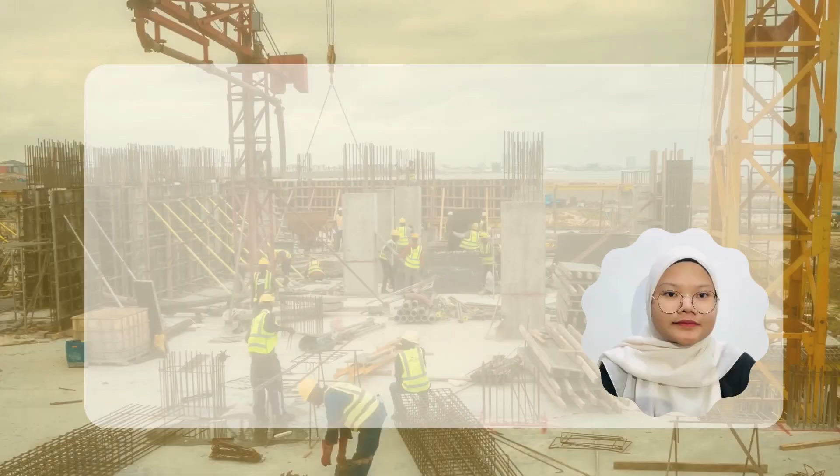Matric number is 2866157. Today I want to talk about construction technology.

Construction technology is defined as a set of innovative tools, which may be software, modification, or machinery, used to carry out construction projects. These tools are highly advanced and improve work speed and quality when put into use. Construction technology is of two types: semi-automated and automated construction tools. These tools are used for different types of projects in the construction industry.

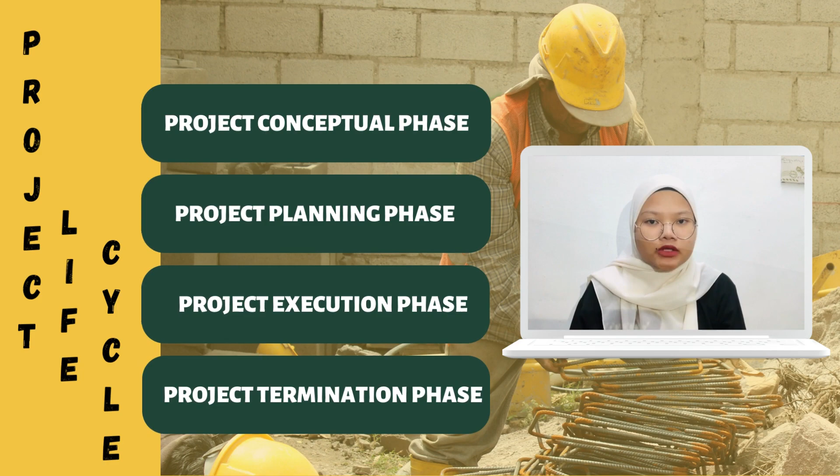Project life cycle is divided into four phases: project conceptual, project planning, project execution, and project termination. Project conceptual determines that a project is needed, establishes goals, estimates the resources the organization is willing to commit, sells the organization on the need for a project approach, and makes key personnel appointments.

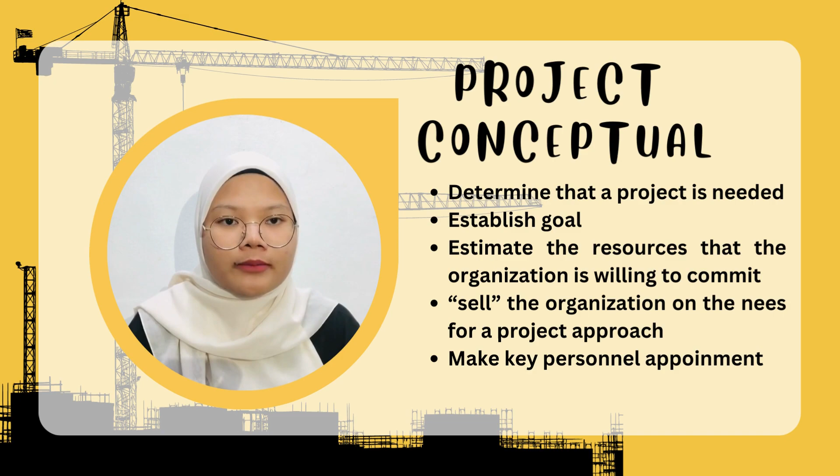Project planning is the most important phase of the construction project life cycle, where the entire scope of the project is defined. The project manager starts breaking down all the work involved, identifying required manpower and material resources, mapping out the project timeline, and detailing the budget. This is also the stage where the project manager anticipates any threats or risks that may arise during construction. Part of the planning phase is appointing all the different construction and third-party companies involved in the building construction.

Project execution is the implementation phase where the project is carried out as planned and physically arranged on site. Each process performed is monitored by the project manager, who compares the tasks performed by each individual with the original planning. If any change or problem occurs, action is taken to ensure the project performance remains good and high.

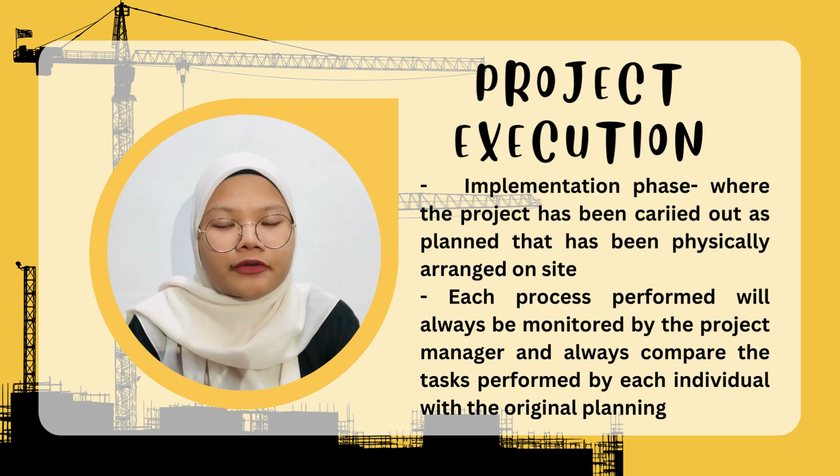Project termination assists in the transfer of project product, transfers human and non-human resources to other organizations, transfers or completes commitments, terminates the project, and rewards personnel.

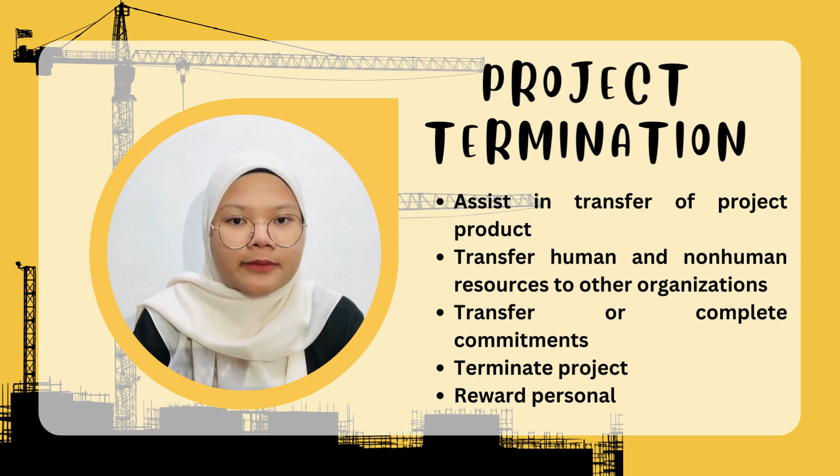Activities involved during a construction project: there are 11 activities, which are marking and grading, excavation, concreting, carpentry, brick masonry, plumbing, welding, electrical, roof laying, glazing, and finishing.

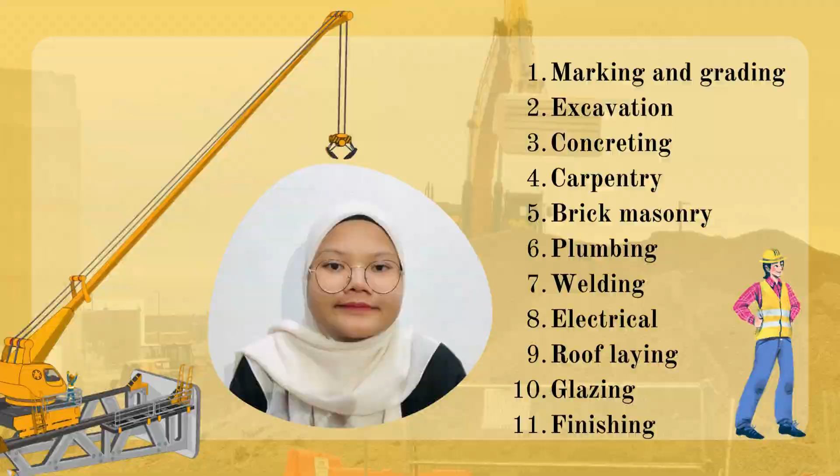Marking and grading. Marking is one of the first construction activities, which involves marking the area of the plot of reference. Grading helps ensure that buildings are even, last long, and maintain maximum support.

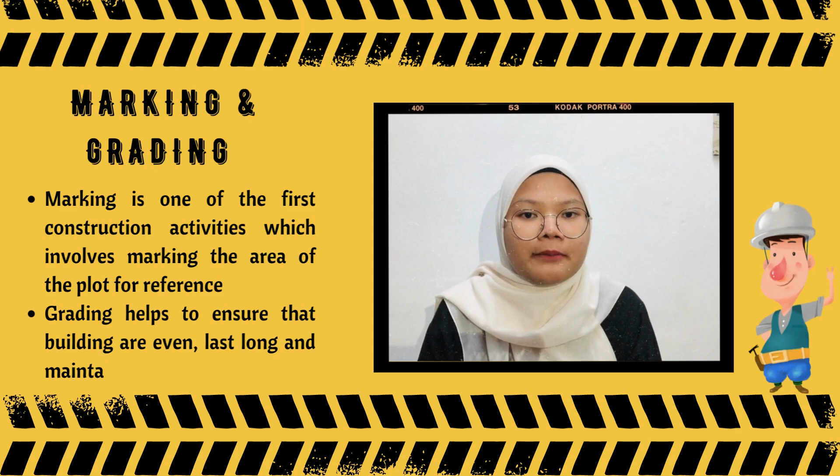Excavation. In general, the term involves moving earth or rock out of a certain area to prepare it for construction. This includes basement excavation, which digs the earth out to prepare for a basement to be built.

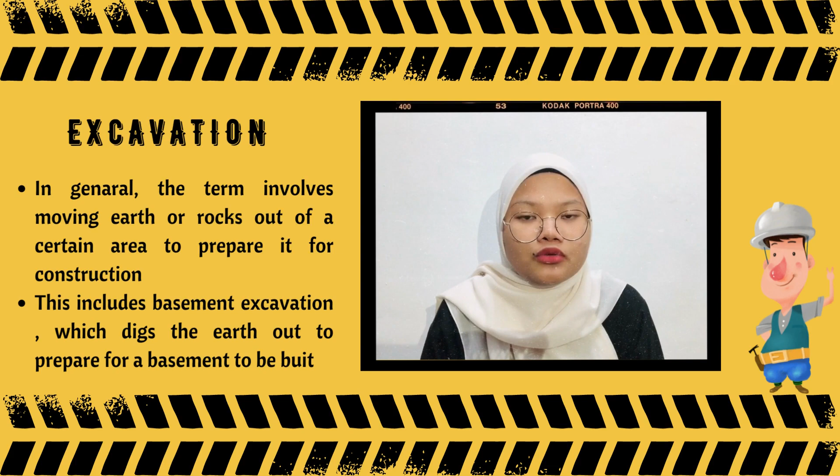Concreting. The process of pouring concrete is another major activity in construction. One of the reasons it has become so popular in the construction industry is that concrete is easy to make in large quantities and it changes state, so it's easy to work with and manipulate.

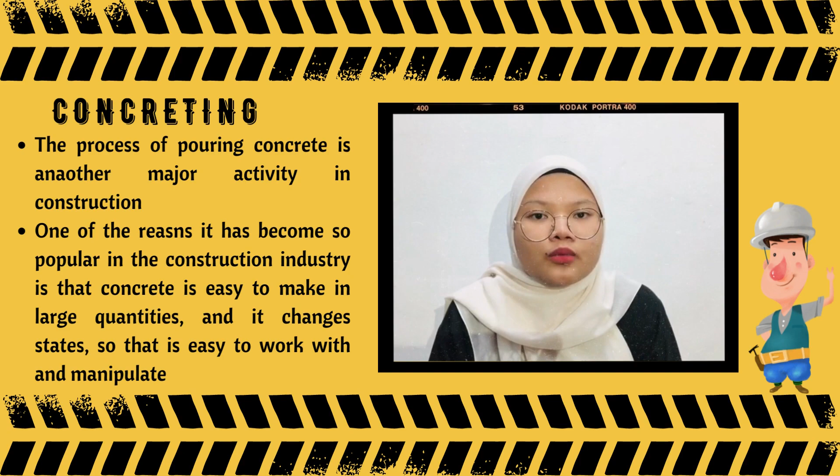Carpentry. This is the general cutting and installation of material that will be used for the construction of a structure.

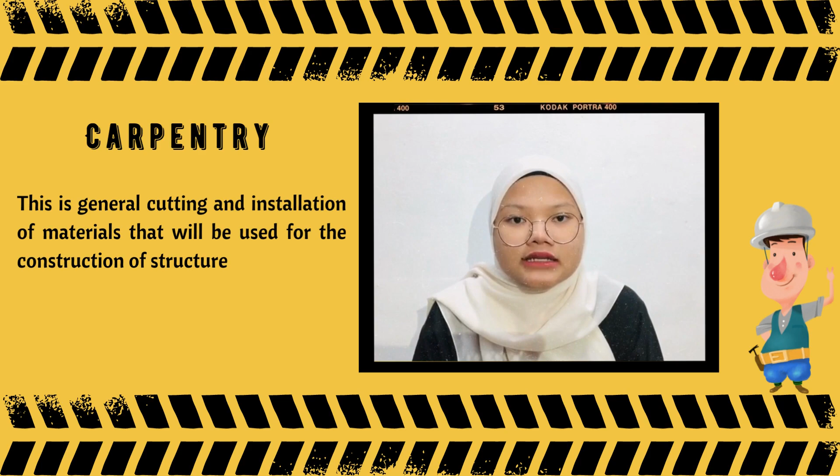Brick masonry. Bricks have been used in construction for decades and are still often used today as a highly efficient material. Brick masons lay the bricks, ensuring they are laid in a way that is structurally sound.

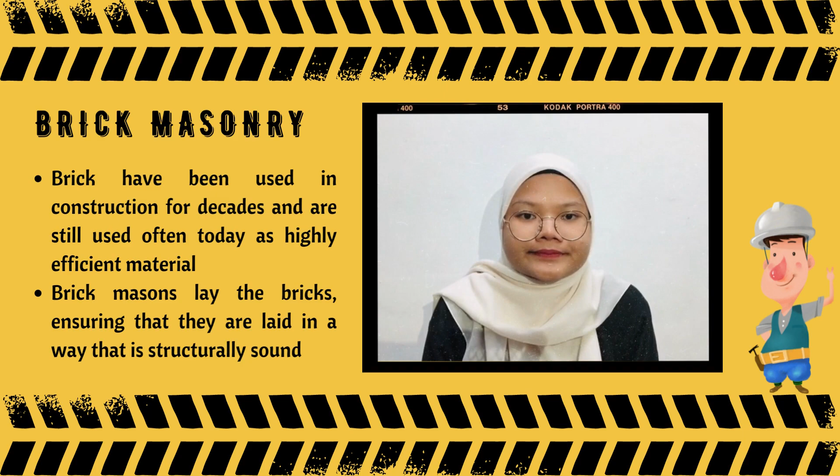Plumbing. In structures that require plumbing, there are specific plumbing activities that must occur to ensure they will function properly. These include putting in piping and fixtures for both incoming potable water and outgoing waste.

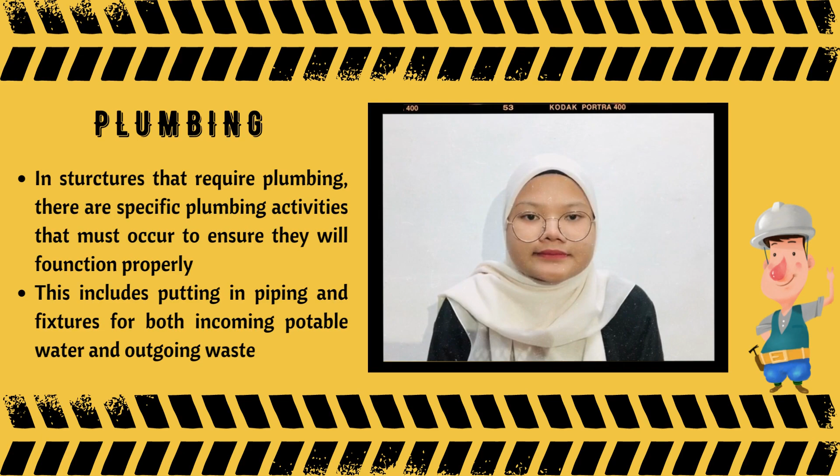Electrical. Individuals working as electricians on a construction project are responsible for ensuring that the structure will ultimately have full access to electricity from the transformer provided by the electrical company, located close to the building.

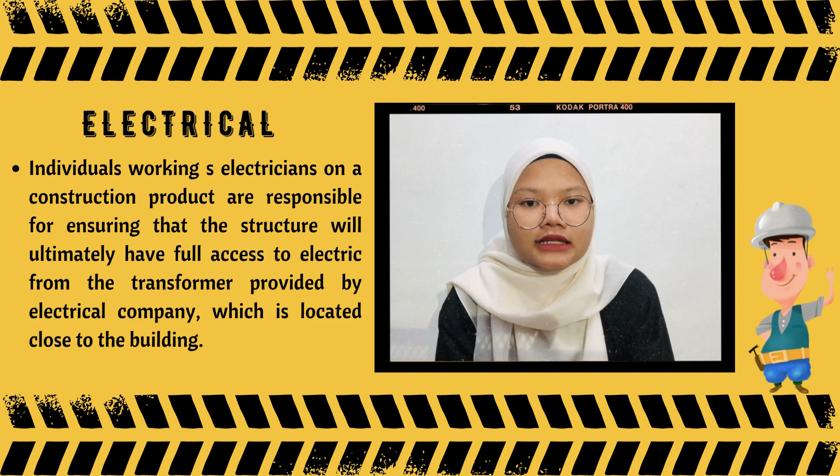Roof laying. Roofing is an important construction activity for ensuring protection of the structure from the elements and can help provide stability for the structure.

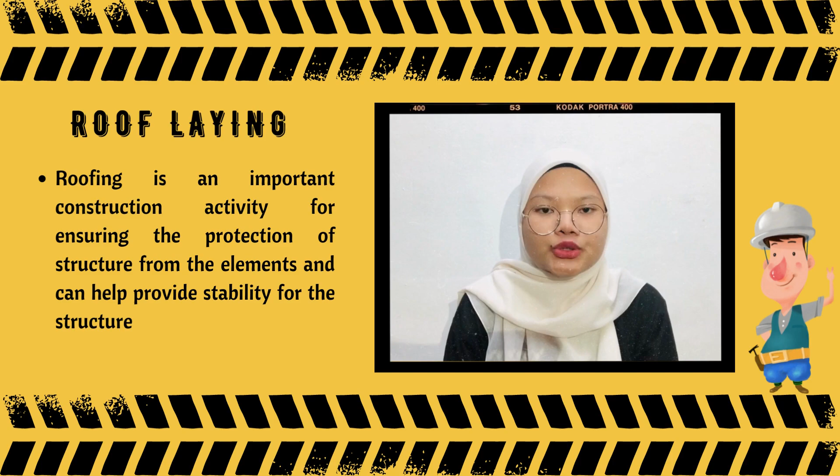Glazing. This activity is basically anything to do with glass, windows, and doors in a construction project. The term is used broadly to reference the installation of pretty much any glass involved in the construction of a particular structure.

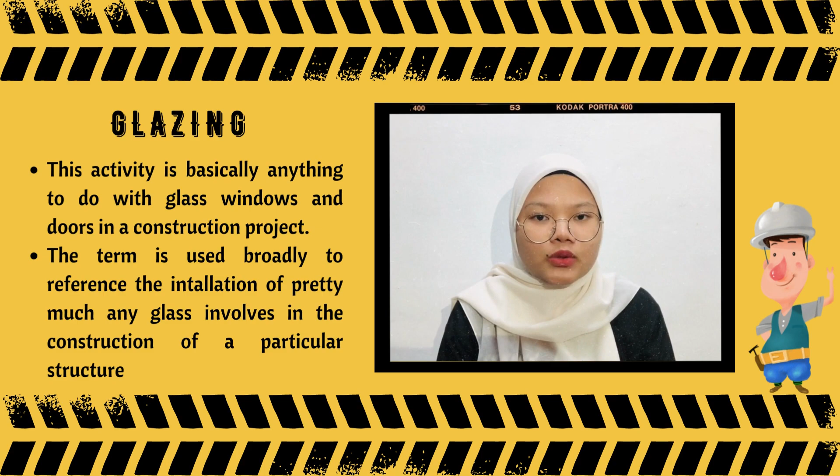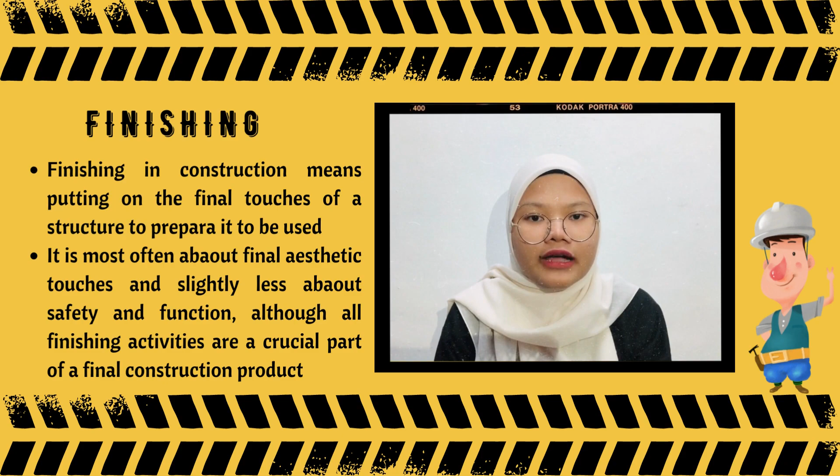Finishing. Finishing in construction means putting on the final touch of a structure to prepare it to be used. It is most often about final aesthetic touch and slightly less about safety and function, although all finishing activities are a crucial part of a final construction product.

The owner's role: define the scope of the project, provide the finance, recognize the need and initiate the project, select the design and construction professionals, and decide when the project begins. Common motives are good design, saving money, and finishing quickly.

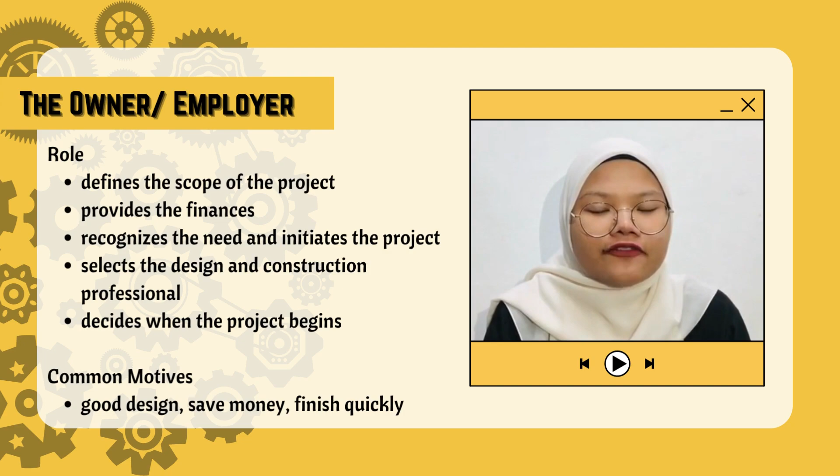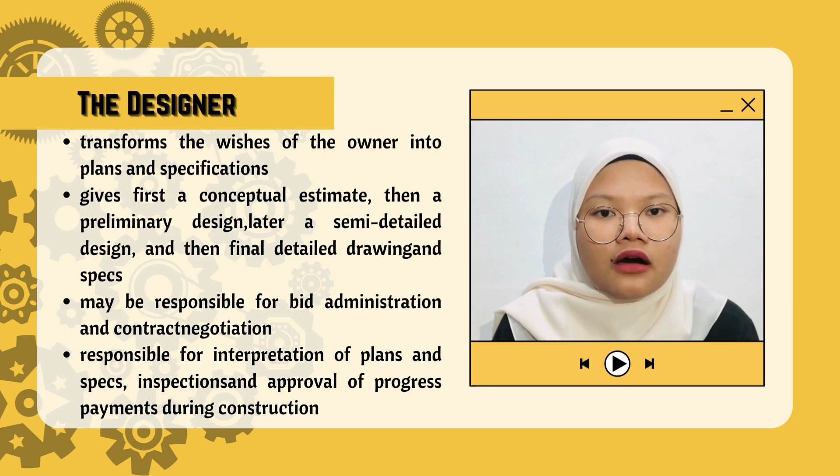The designer's role: transform the wishes of the owner into plans and specifications. Give first a conceptual estimate, then a preliminary design, later a semi-detailed design, and then a final detailed drawing and specs. May be responsible for bid administration and contract negotiation. Responsible for interpretation of plans and specs, and inspection and approval of progress payments during construction.

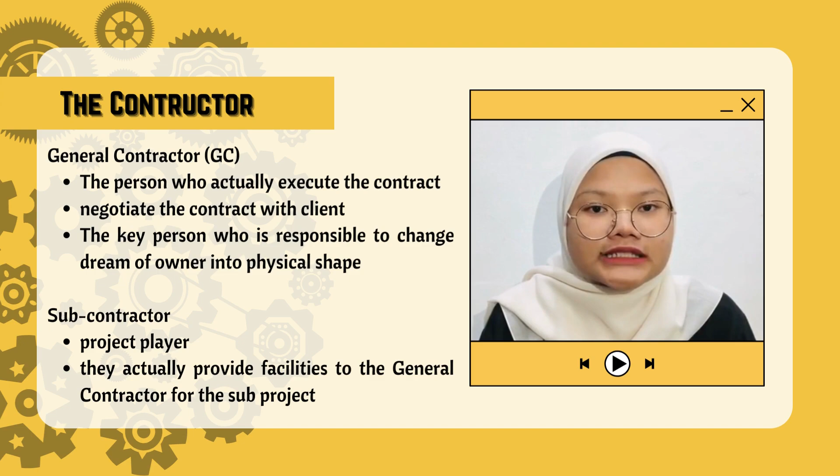The contractor: general contractor (GC), the person who actually executes the contract, negotiates the contract with the client, and is the key person responsible for changing the dream of the owner into physical shape. Subcontractor, a project player, actually provides facility to the general contractor for the sub-project.

Project planning and controlling. Planning, as explained in the previous slide, is part of the life cycle of the project, where the planning process is one of the most important processes to ensure that the project runs smoothly and in turn can give good results if able to control systematically.

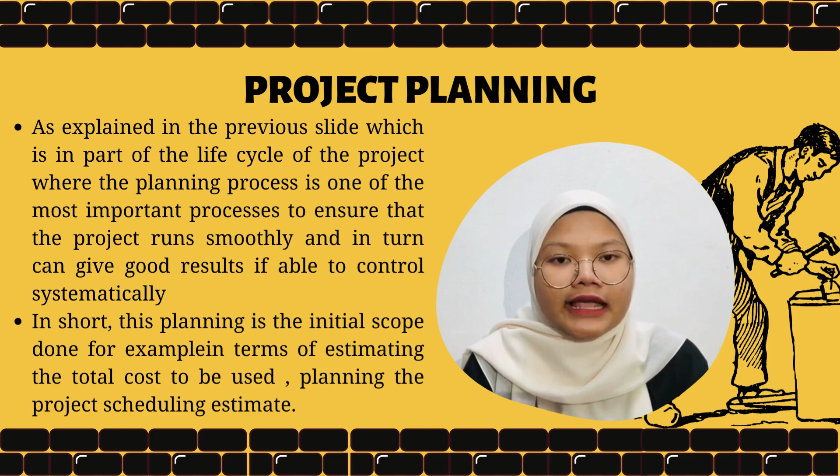In short, this planning is the initial scope done, for example in terms of estimating the total cost to be used, planning the project, scheduling estimates. Besides that, any possible analysis of the risks that will occur will also be emphasized in this initial planning, and if any problems arise, changes to this plan will be made from time to time.

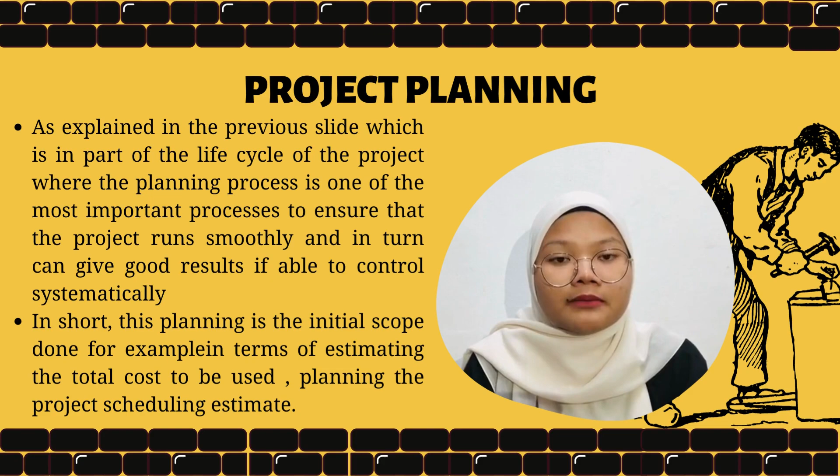Controlling. Any preliminary planning that has been done at the beginning of the project will be monitored and controlled carefully by the project manager, and any changes from time to time will be made.

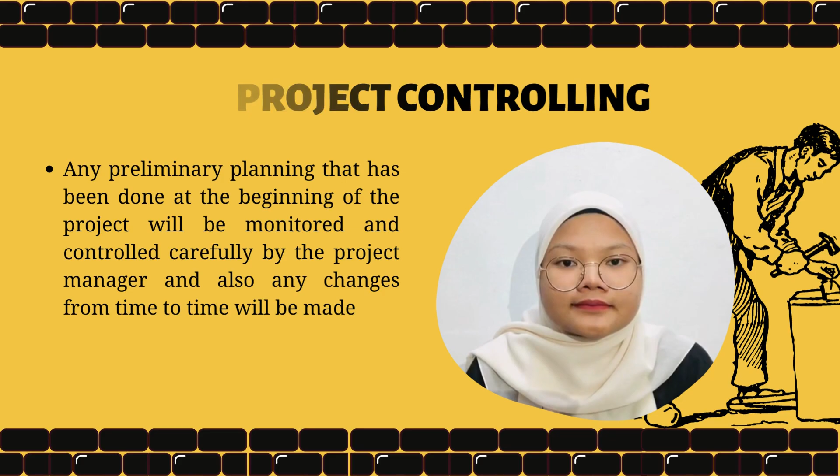A successful construction has 5 elements: 1. Implement continuous planning. 2. Have your risk log ready. 3. Hire the right person. 4. Establish an effective communication plan. And 5. Consistently monitor progress.

Implement continuous planning. During the planning phase, project members and stakeholders will establish deliverables, define goals, and outline project milestones. A well-planned project will provide a timeline and a step-by-step roadmap to complete the work on time and within budget as agreed upon in the initial meeting.

But anyone who worked in construction already knows that even a simple project is never really simple. It can and almost certainly will evolve and involve some level of change. For example, encountering unexpected environmental issues during the pre-construction phase could result in the need for design change, which could then impact the entire construction plan and timeline.

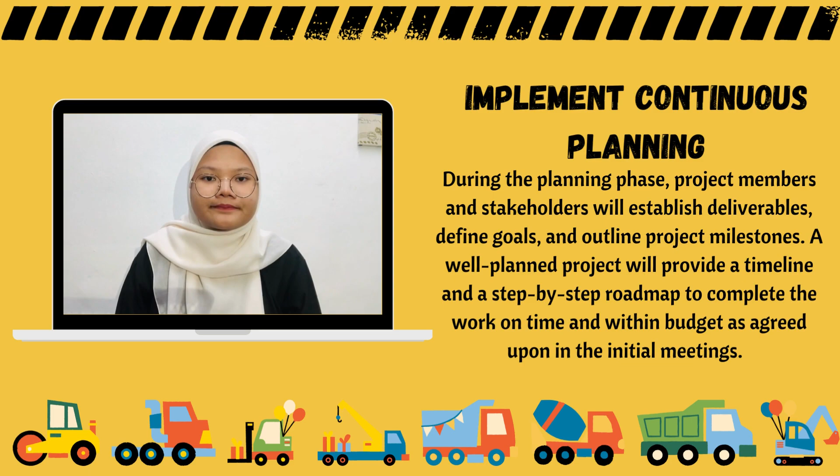Have your risk log ready. Being able to identify, monitor, and mitigate risks is fundamental to successful project management. During the planning phase, project managers should prepare a risk log that outlines any foreseeable risks the project may face, as well as an action plan for what to do and how to resolve any issue that arises.

Once the risk log has been drafted, it should be distributed to project members and stakeholders to equip the team with the confidence and know-how to resolve any issue.

Hire the right person. As is true in any industry, the people on your team will either contribute to your success or failure. Because construction project management has so many different components, variables, and moving parts, it's absolutely critical to have the right people assigned to every aspect of the project to create high-performing cross-functional teams.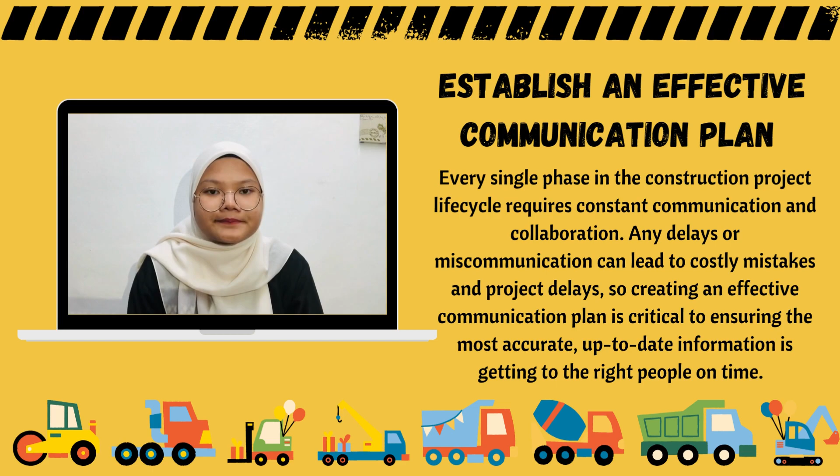Project management software allows PMs to monitor data in real time and provides the ability to generate custom reports that can be shared with other team members and stakeholders to keep everyone informed and on the same page.